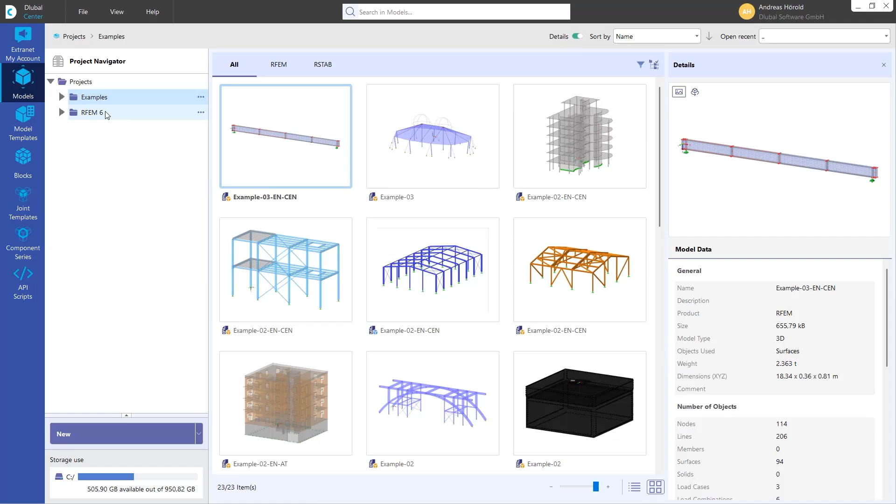People who already work with RFEM 6 know that. I would like to give you some tips and an overview of how you can work with the Dlubal Center, and show what's new that we've implemented. Let's start with the models, the most important tool in the Dlubal Center to organize your projects.

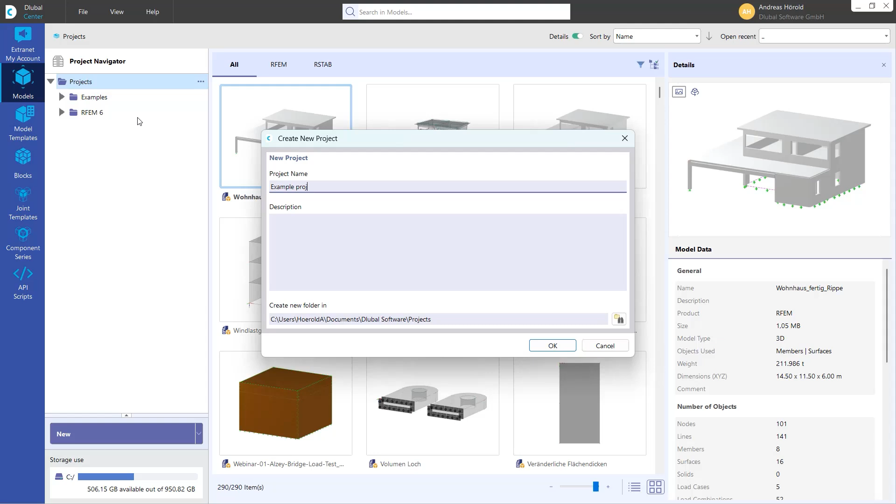Let's create a new project with a right click on Projects. I can create a new project, and let's call it Example Project. Okay, that's the new project.

I would like to create a sub-project. Again, right-click on Example Project, then create new project, and the new project should be Model House 1. I can add a description here if I want.

Again, a right-click on Model House, and I create a new file, an RFEM model in that case, and I call it House Variant 1.

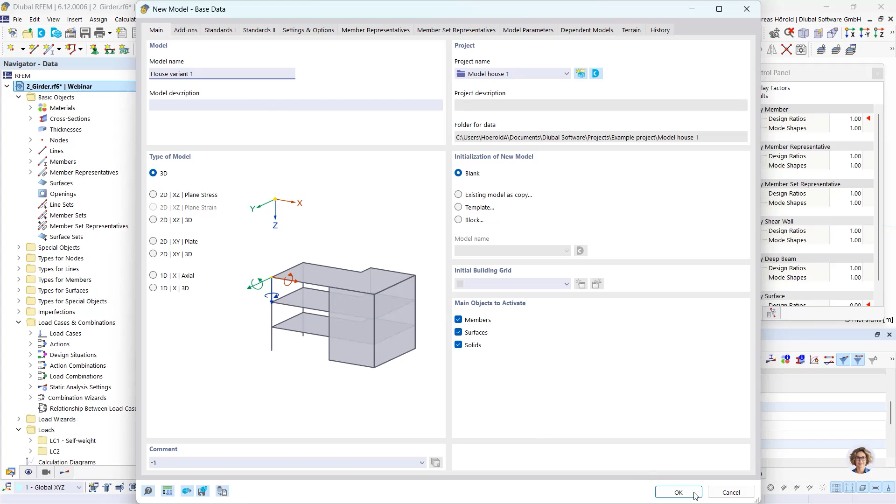Turn back to the Dlubal Center, then you can see the file here. If you switch to the list view, you can add different columns here. For example, created in version, created by user, or I can remove them with a double click, and add used add-ons, modified by company, or created by company, as you want.

Different types are available. Now you can see the added columns here.

I can open, for example for the Example Project, with a right click the folder location, and the Windows Explorer opens. I can create a new folder here too. With a right click, new folder, and I call it Model House 2.

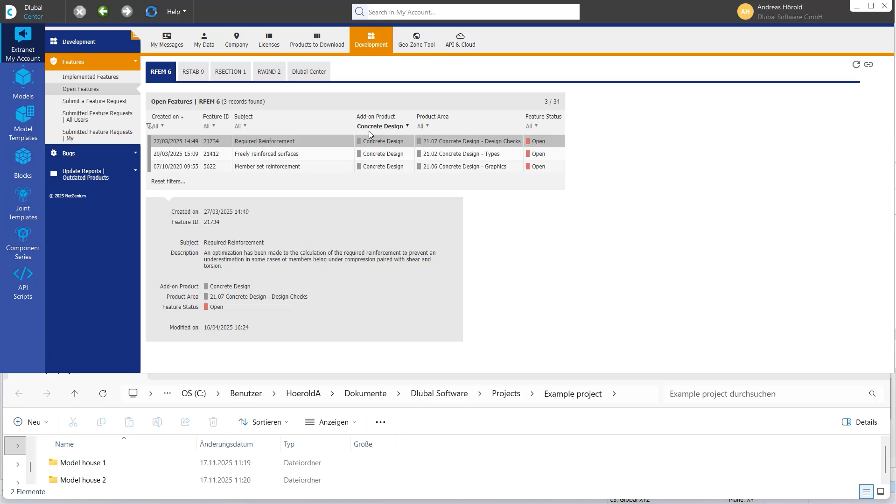Let's turn to the Extranet and My Account. You can see the Extranet messages here, or what's quite important, the development. You can see implemented features in a certain add-on, for example, or select all to see all implemented features. You can see open features for certain products or all products, and then submit a feature request, which maybe will be implemented in the future.

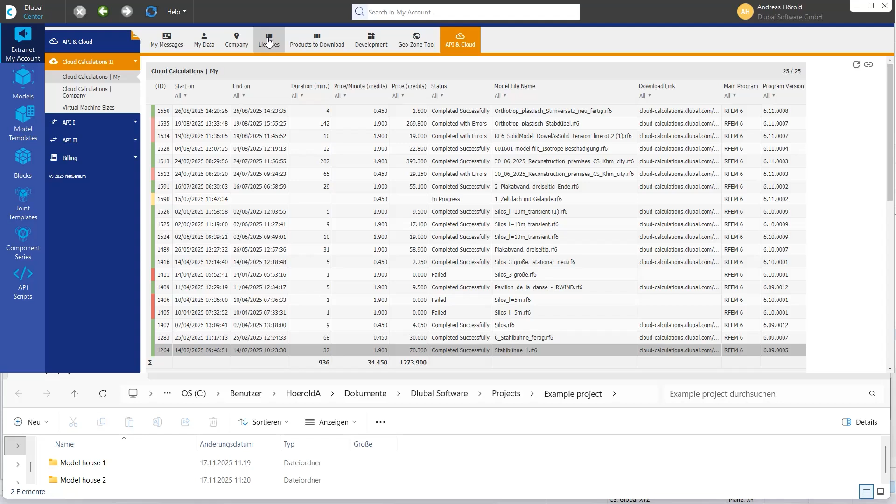Then, for example, you can see the GeoZone tool requests - those are my requests from the past. Then the API and cloud - those are calculations from my side from the past. Then you can see here the data of you and of the company, your licenses, and so on.

Then we turn to model templates. The Model Templates category in the Dlubal Center provides an overview of the models you have saved as template files. In my case, it's empty. An important message: the Save as Template function in the File menu in RFEM allows you to save your current model as a template.

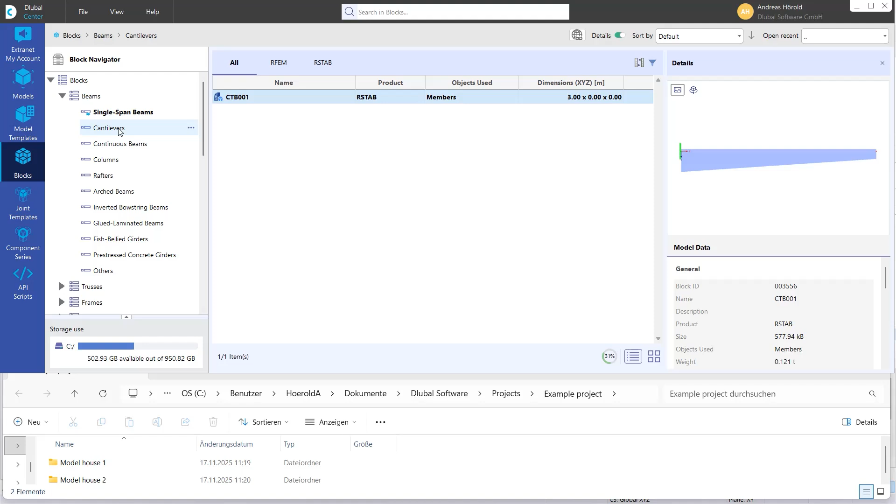Then you can see the blocks - those are parameterized, and most of the models have parameters implemented. Let's go to this view, the tiles.

Simple models and more complex models, for example curved surfaces and so on, concrete structures - a lot of blocks are available. Just use them, that's quite easy to handle.

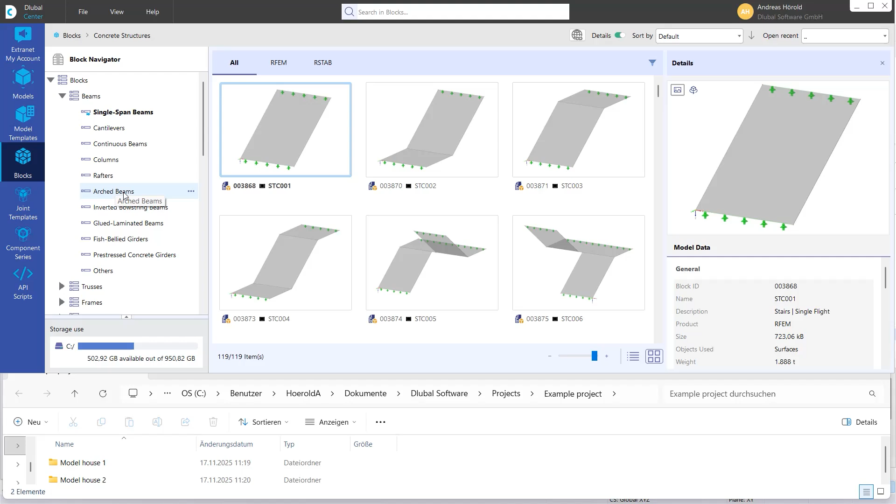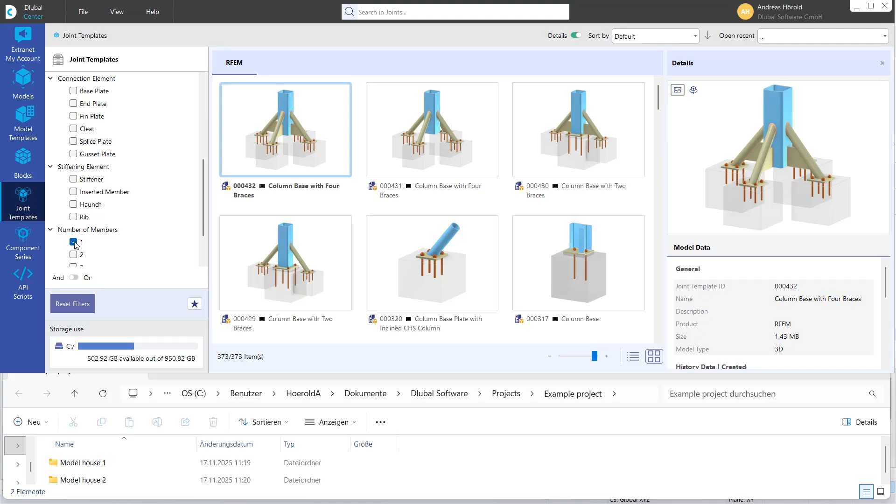Then the joint templates - you can select certain templates of joints. You can use it in the add-on, also in the steel joints add-on, for example also number of members, or joints with ribs, cleat, and so on.

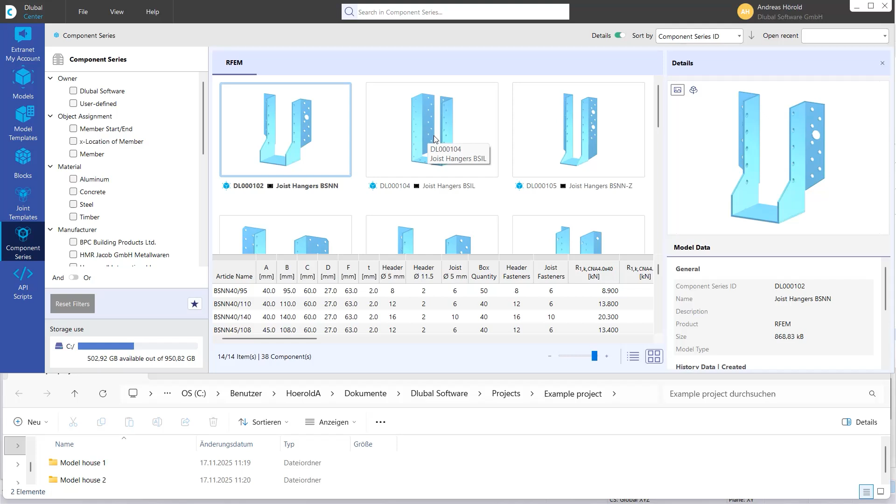Then that's a quite new part of the Dlubal Center, the component series. We are in the development of the new add-on components. It's currently in alpha version, meaning it's in preparation, and in the future you can use the values of such joints and compare your internal forces with the maximum forces of the joint.

And API scripts - there are already sample scripts that you can also use for your project. Okay, that should be all for this question. Let's turn back to RFEM.

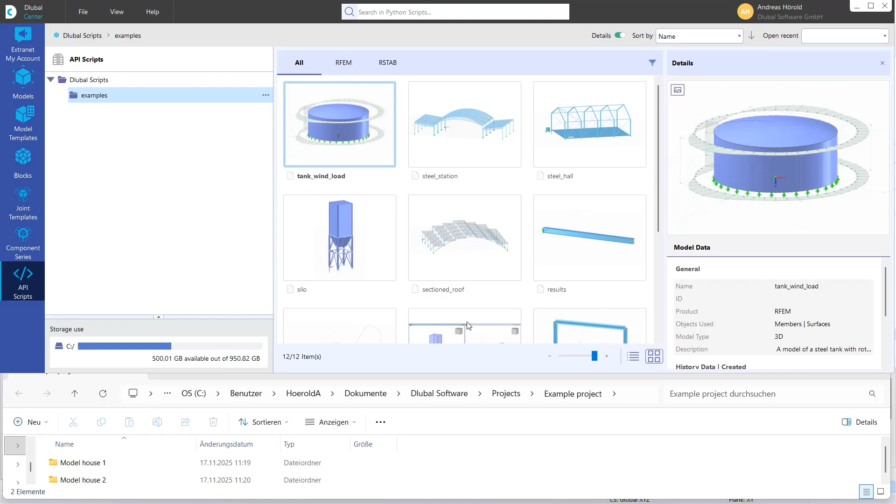The next question is: can I design longitudinal fillet welds according to Eurocode 3, part 1-8, in RFEM 6? Yes, that's possible now, soon we will release that feature, and I can show you how to do that. I've prepared a simple single span beam here made of a cross section HE 180A.

Imagine you need to use a girder with a maximum height of 175 millimeters. It's not possible, as you can see on the design ratio, with the HE 180A, and it's also not possible with an HE 180B. That's why we create a welded cross section.

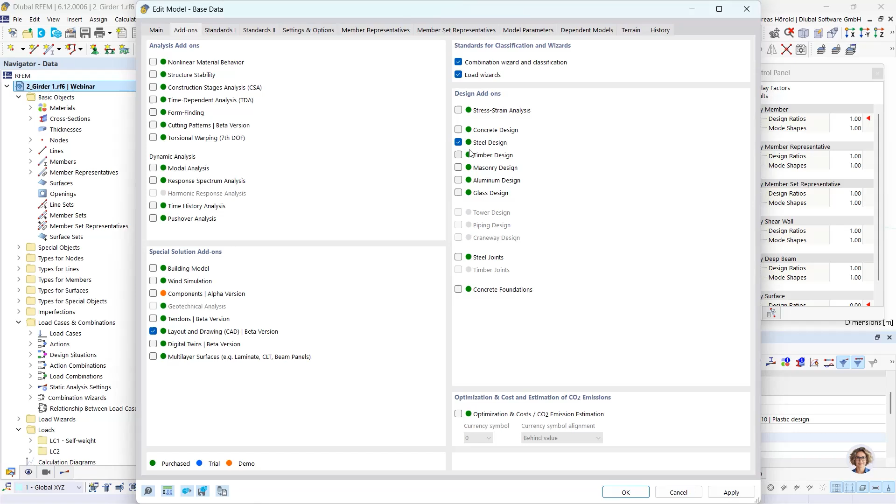At first, it's clear - I go back to the base data. It's necessary to activate the steel design for that feature. Then we create the welded section. I edit this used section, turn to the library above, and select thin-walled I section.

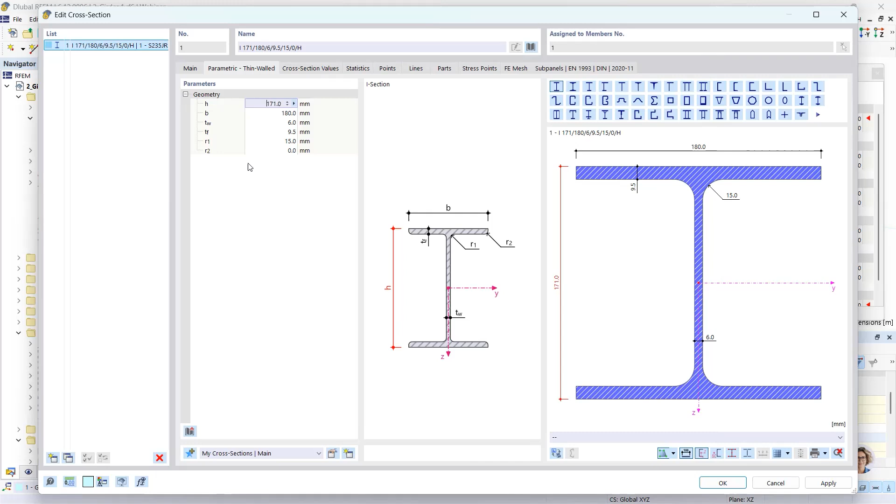Before I enter the geometry, I go back to the main part here, main section, and select welded here. Okay, then I enter the parameters.

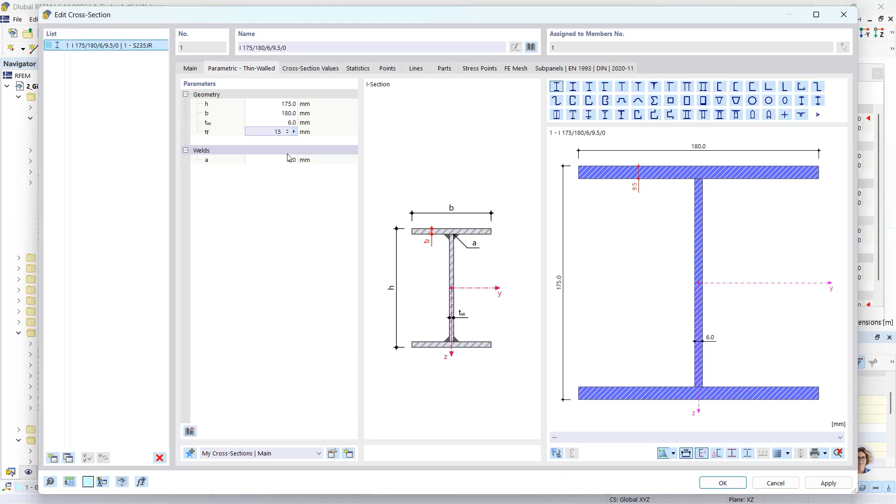Maximum height should be 175 millimeters. Then the other values can remain, but not the thickness of the flange - it should be 15 millimeters, and the weld should be 3 millimeters.

Then I have to activate the weld design. I turn to the navigator data, then steel design and the ultimate configurations, default. I can turn to that chapter here also when I use a double click on the beam.

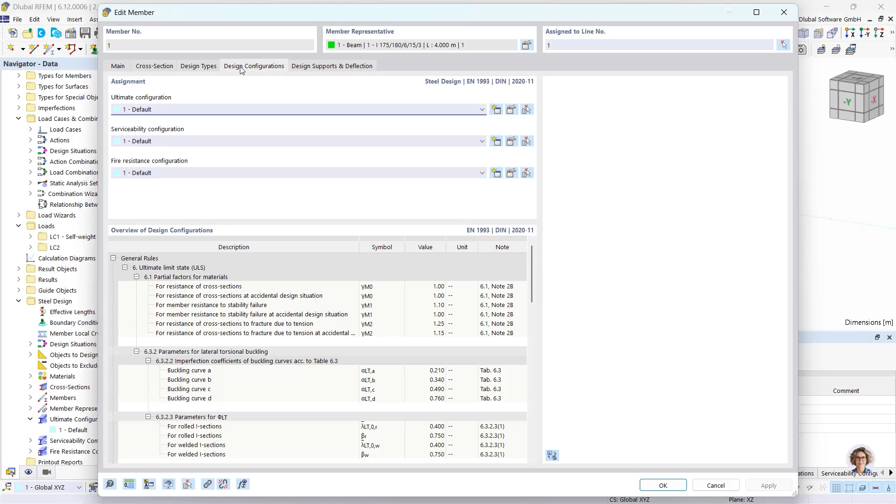Then the design properties are activated and I can find the design configuration here, and I can edit it also with that button. So then I have to activate the design of the longitudinal fillet welds.

The correlation factor should be determined according to the Eurocode. It's dependent on the material, and in our case it should be 0.8 because we have a material S235. And if you want, you can also use a user-defined correlation factor.

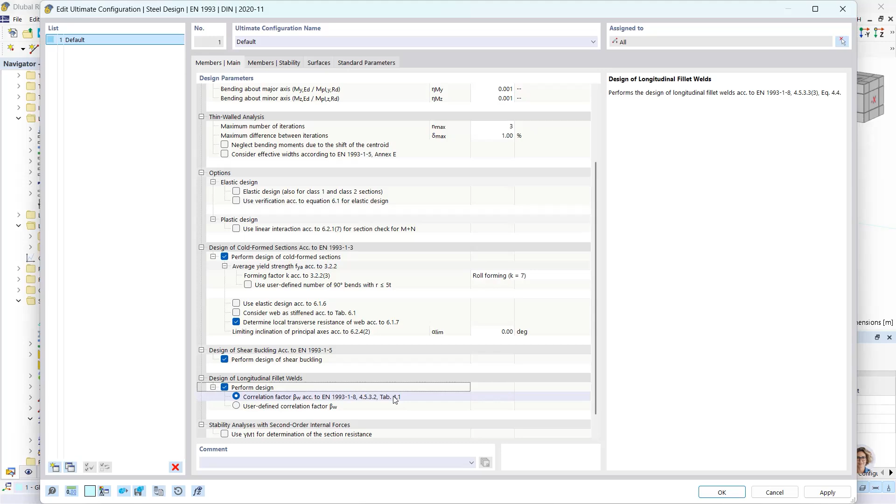In most cases, we will use the automatic data determination according to Eurocode. Okay, so then I start the steel design again.

So the combinations are calculated in parallel. Let's turn to the design ratios on members. Yeah, and you can see there's an error.

If I double click on the line, the details are opened and you can see the throat thickness of one or more longitudinal fillet welds is smaller than the limit according to Eurocode 3.

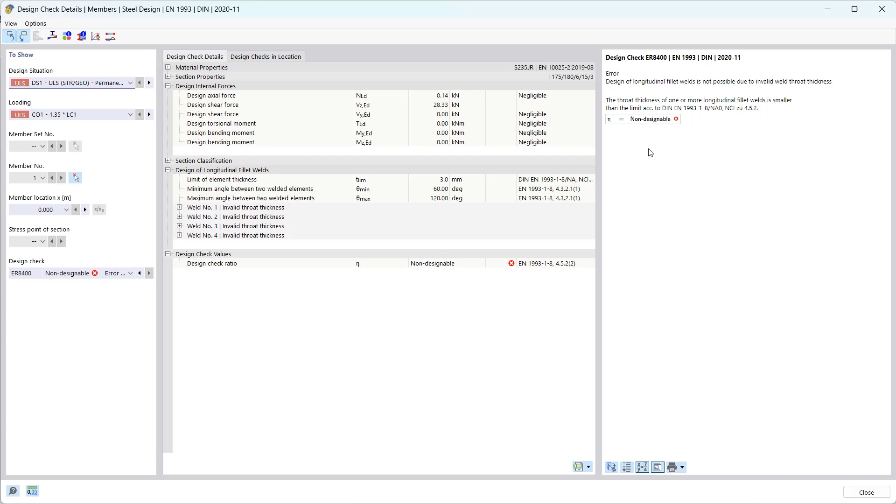Now the program checks that automatically. In that case, the weld is too small and we need to increase the weld. So I turn back to the navigator data and do a double click on the cross section, and I increase the weld to 4 millimeters. Okay, then I run the steel design again.

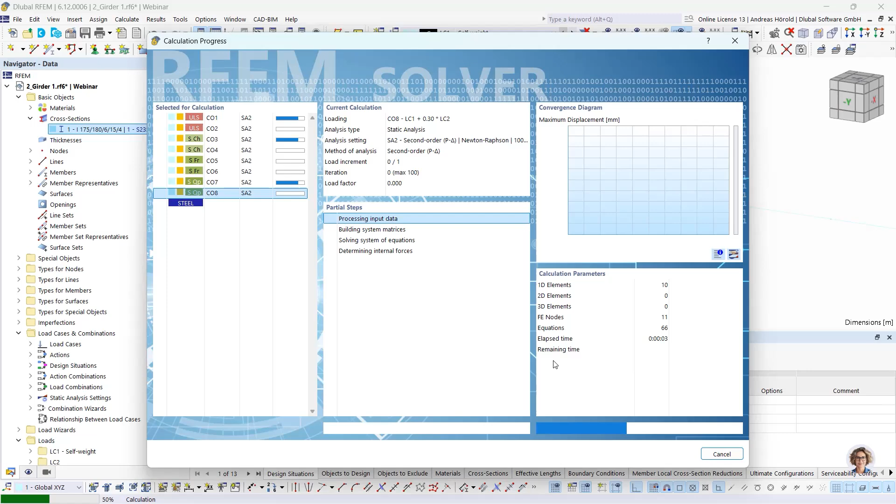So now the design of the weld is done. Double click on it and I can see the design checks - the 0.8 can be found here, the correlation factor, then the thickness of the weld, and the design check ratio is approximately 30%.

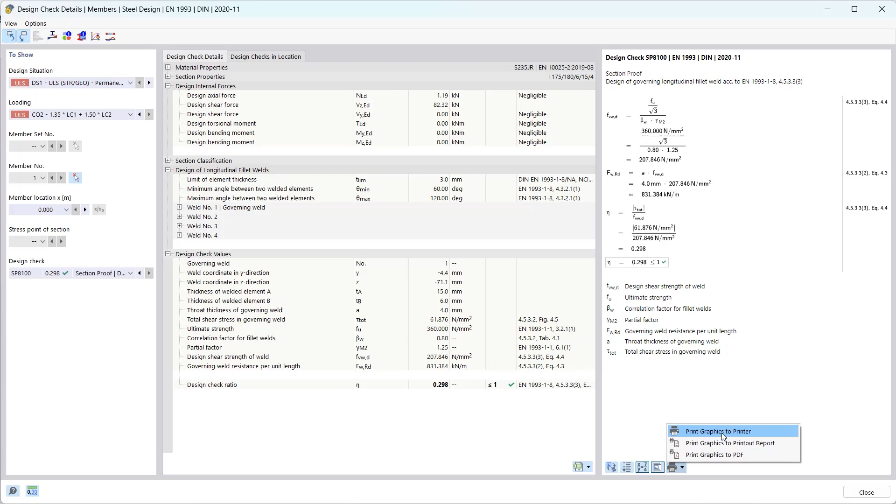And of course you can also print the formulas and so on, on the printer or in the printout report. Okay, that should be all to this question and to this model.

The next question is: how can I smooth results in RFEM 6? That's an often asked question. You can do that with a surface results adjustment. In RFEM 5, we called it average region.

Such a surface results adjustment describes an area in the model whose graphical results are not represented by the actual diagrams, but as mean values. And you can use a user-defined adjustment area to evaluate the smoothed surface internal forces.

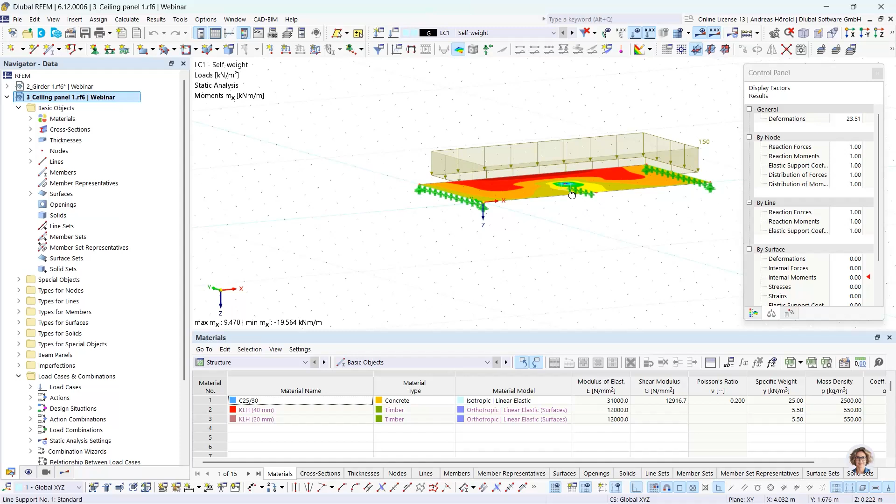You can see that ceiling panel here and a wall here. Imagine it has a thickness of 20 centimeters. And you can see there are singularities at the end of the wall here. So we would like to use such a surface results adjustment to smooth the results.

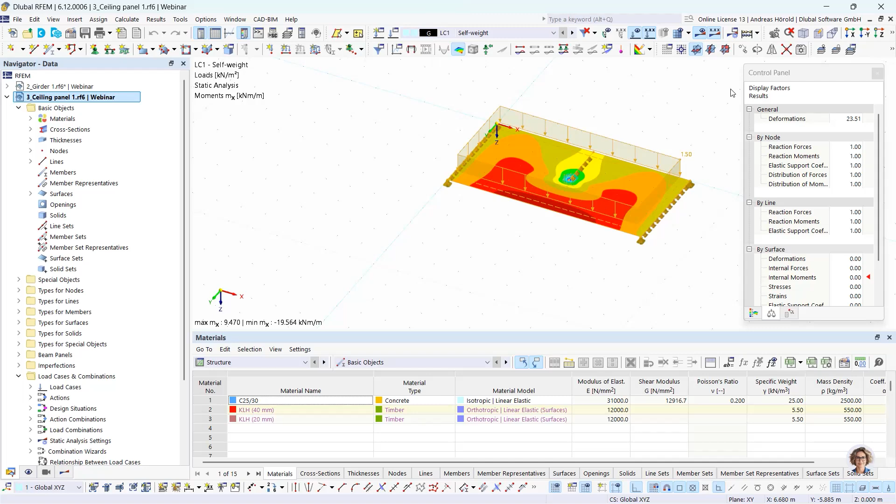So to compare the results, I copy that ceiling panel - select all, then use the move and copy function, create a copy, 6 meters in Y direction, including loading. Okay.

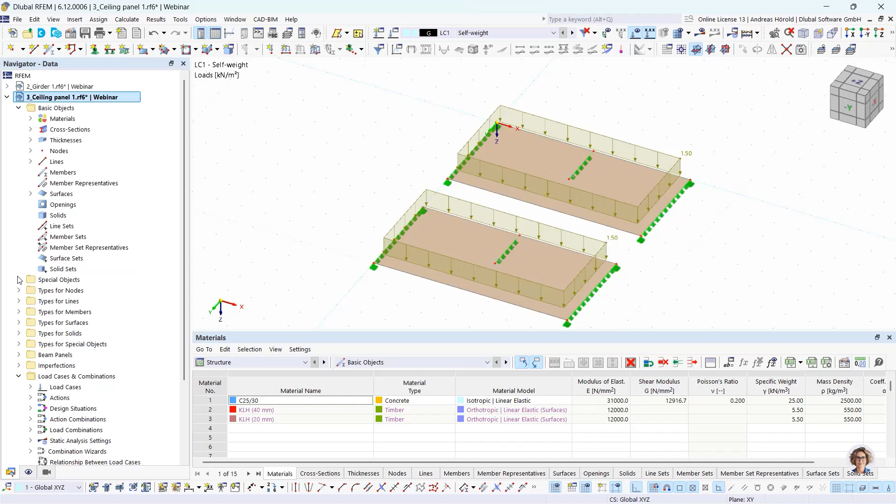So then I turn to the navigator data, and under special objects, you can find the surface results adjustment. You can also find it in the menu under Insert, Special Objects, Surface Results Adjustments, and I open the dialog box.

At first, I have to assign a surface. That surface, okay. Then you can select different shapes here: rectangle, circle, ellipse, and polygon. I use rectangle, and the dimensions in our case should be 20 by 20 centimeters. And I select the node.

So, to define the position correctly, I move it to 10 centimeters to depict the wall end correctly.

So then there are different adjustment types. The default setting is for the direction u, averaging of my, mxy, and so on. It's for basic internal forces in surface direction y. And the second line here is the default setting for basic internal forces in surface direction x.

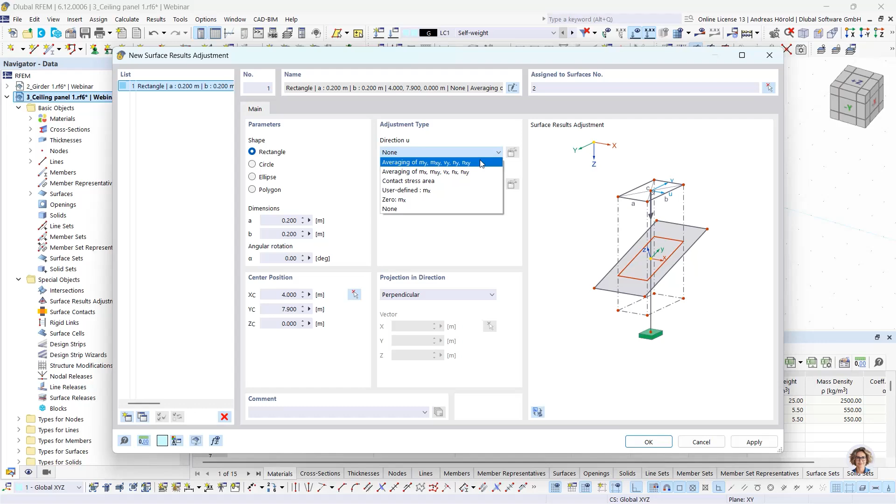So I use the default setting, press OK, and then we calculate everything again.

And let's compare the internal forces for both slabs. The maximum value for both is 90.5 or minus 90.5 - the mx internal forces in that case.

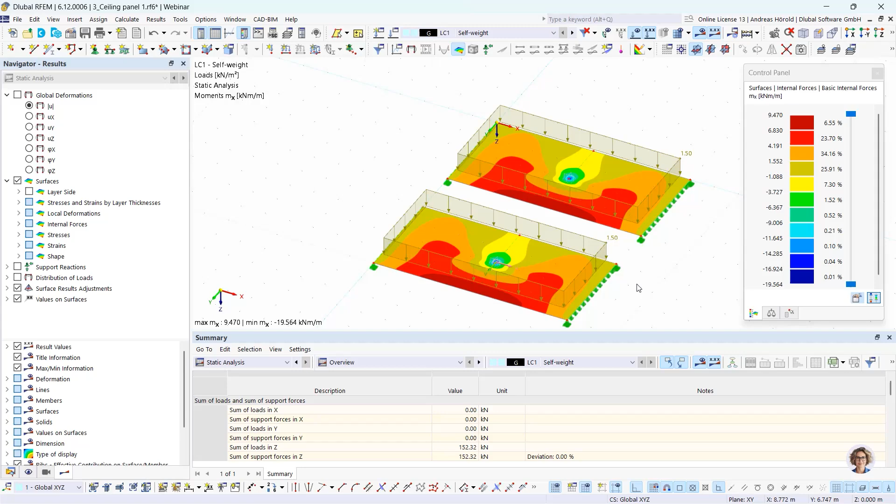And if I want to see what the maximum value is here, I can, for example, deselect that slab, hide selected objects. Okay, and now the maximum value is minus 16. That's the possibility to smooth results in RFEM 6.

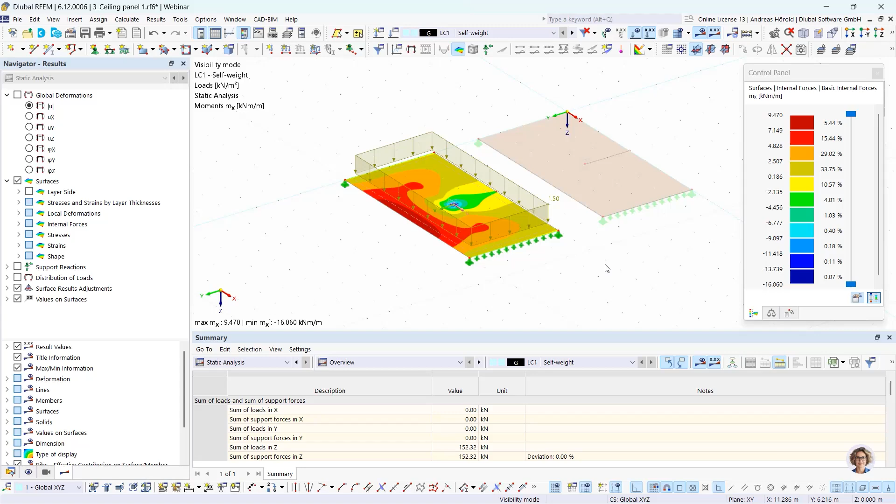Thank you, Andreas. I will continue with the next topic. The next question is: where can I find specific wind settings in RFEM 6.12 and later?

As you have maybe already realized, we changed the GUI in RFEM 6 a bit to be able to hand over more data to RWIND with the GUI in RFEM 6 without stepping directly into RWIND. Let's start with the basics. Usually, at first you activate the add-on wind simulation, and you can choose the standard group for your wind profile in order to determine your automatic wind profile for your region.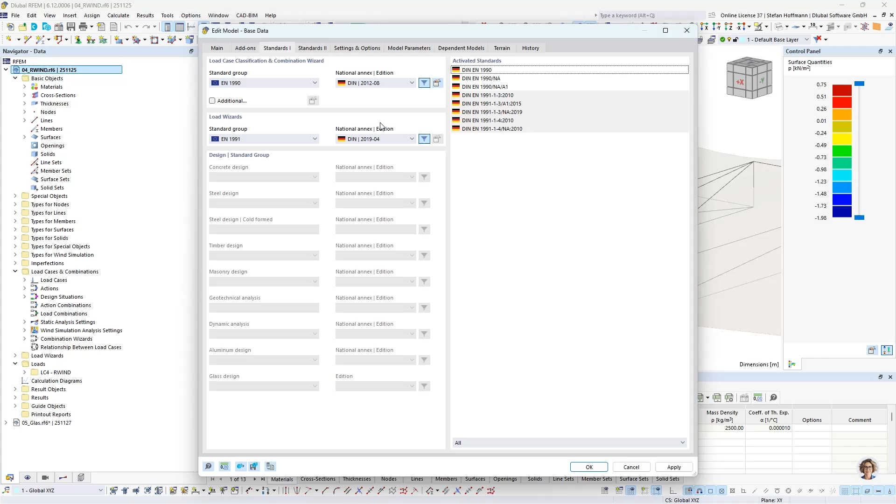If you're already interested in adding a terrain to represent your location specific behavior of the wind, maybe by trees or some mountains, you can already activate a terrain in the base data terrain settings. You can choose between no terrain, of course a horizontal plane, an inclined plane, some table values, or - as I am using, and this is most likely also the first change - an IFC file.

Model objects - this is no more found in the mesh settings to adjust the IFC as a terrain. You already input it as the base data in the tab of terrain. So I'm simply using an IFC file where I've modeled a simple shape of my terrain, and you can do some more inputs on the size of your terrain already here.

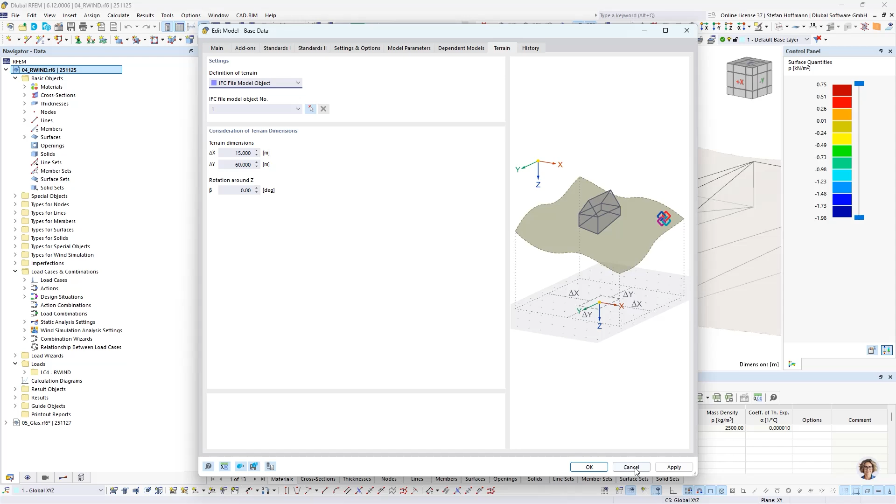So if we jump into the model, you already know that in the mesh settings you have a tab of wind simulation, and for the regular customers, you already realize that this tab has changed a lot in the GUI. We moved some parts, of course, and you now have the option to assign objects from shrink wrapping - the shrink wrapping mesh, which is later necessary for the calculation in RWIND, in order to be assigned to your main structure or surrounding objects.

So you can already split in over here, but later on also in the objects - this is currently not in use. You can as well choose to activate the terrain, which we set in the base data, to be considered for the calculation. You can also jump into the base data.

You can moreover, as already known, adjust the level of details for your members. You can choose to close hollow sections. You can consider a surface thickness in general already, and the two known options to keep our wind results if the mesh is deleted, and/or to run RWIND in silent mode.

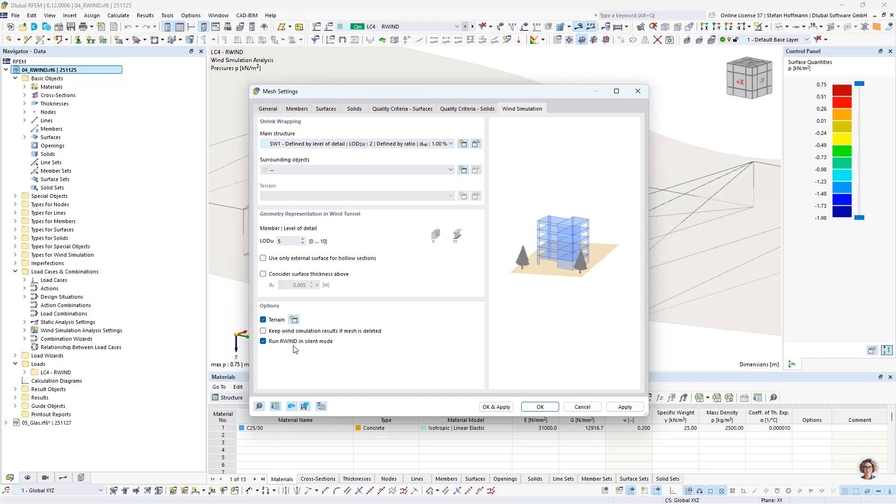As known, you also have settings in the load cases from the analysis type wind simulation. So if we jump into the tab, this has not changed a lot, I think. You can assign wind simulation analysis settings, where you can, for example, differentiate between steady flow and transient flow.

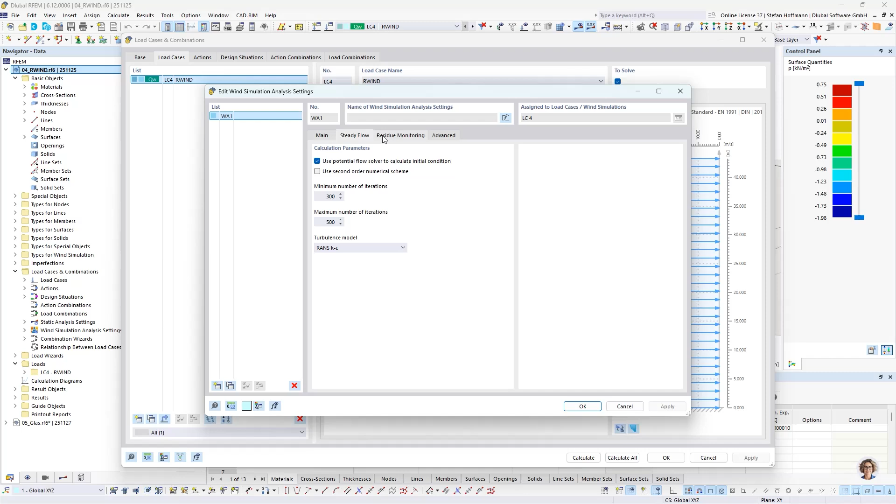You can hit some more options to be handed over to RWIND. You can also step into the tabs to add some more input for the wind tunnel. The wind profile did not change from my point of view, so you can simply assign a wind profile according to a standard and hand this over to RWIND directly. Some more checkboxes at the bottom - everything is usually explained in more detail in our online manual.

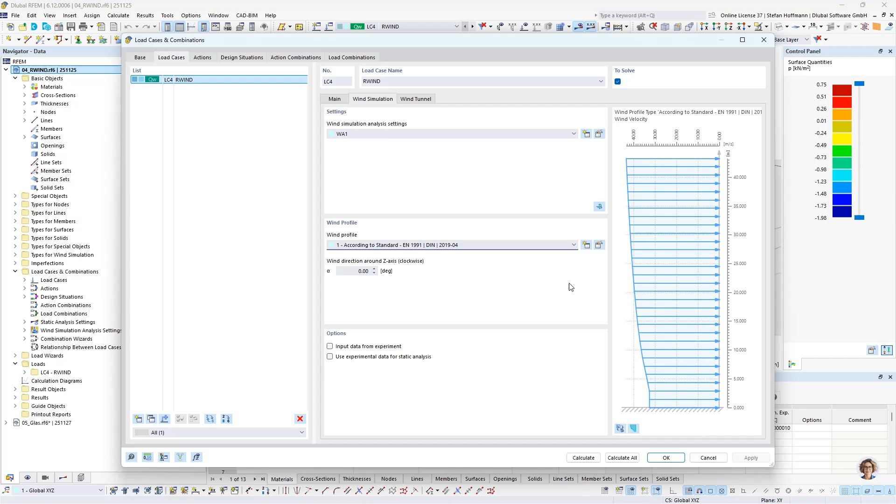The biggest change, in contrast to the mesh settings, is that now every object, if you click on it for example, has a specific wind simulation setting on its surface which you can activate. You can see this tab allows you to assign different shrink wrapping settings for surfaces. So if you have a small surface, you can assign a finer mesh later on because you're interested in facade engineering and results at that point. And if you have a bigger surface, which is of less interest, you can assign a coarser mesh.

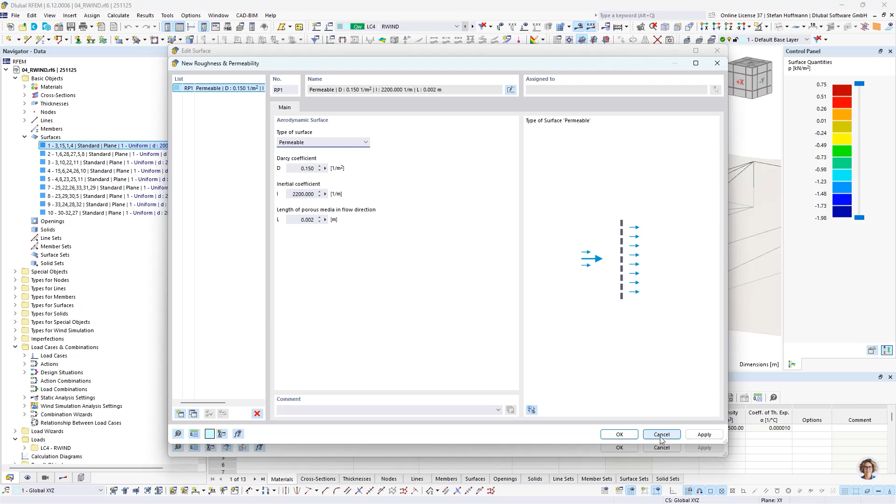You can also define the roughness and permeability as an object. So as you may already be used to in our wind tool, you can use a closed surface and enter permeable options for it, so the mesh will not be fine, but it will be considered as permeability later on. You can also check to consider surface thickness, and an interesting option is that you can simply exclude this object from the wind tunnel.

What we did not change is that you still have your wind simulation analysis results, and you can still split the view to show it on the original model and/or the computational model.

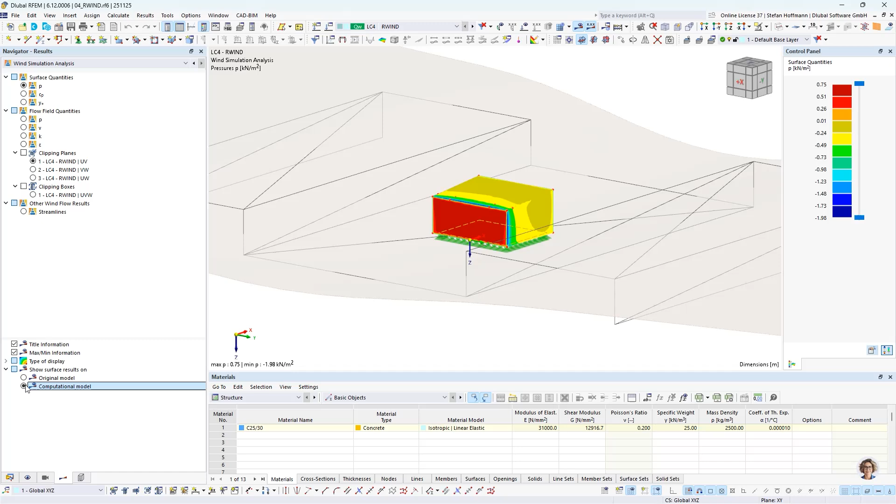We will step to the next question.

The next question is, can I control the shear coupling for laminated glass in RFEM 6? Usually, with laminated glass, shear coupling is of interest, because if you have a layered pane with two panels of glass and one foil in the middle, one worst case is that you do not take the shear coupling into account, having big deformations and stresses only in the glass panes. But it might also be of interest, which is why we use laminated glass, that you can take the shear coupling into consideration. Sometimes you are allowed to do this.

With regards to the German standard 18008-1, it offers two requirements in chapter 7.2.1. It mentions that when determining the stress and deformation of laminated glass and laminated safety glass, favorable shear coupling between the individual panes must not be assumed. But in the next chapter, 7.2.2, in the case of unfavorable shear coupling, e.g. in the case of restrained stresses, full shear coupling must be assumed. So you usually have to consider both states in your calculations.

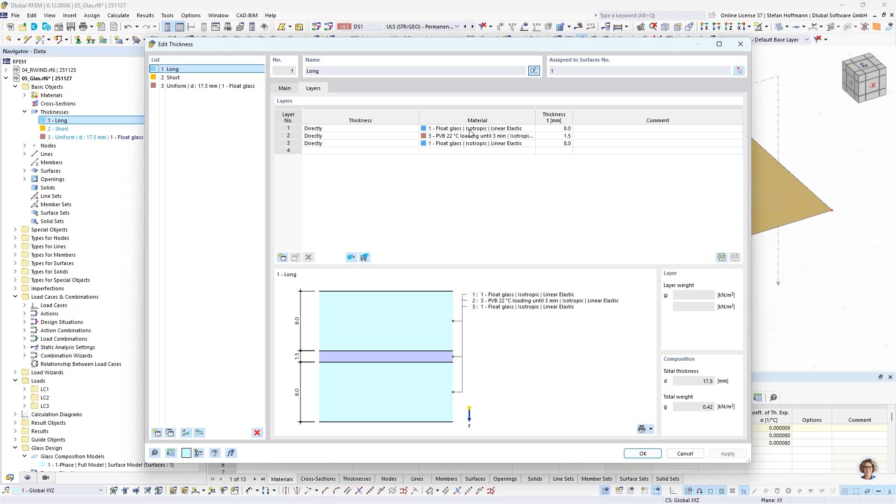First, a quick look at our model. It's a glass pane with 4 point supports, and I have created a thickness from the type glass composition. I have 3 layers: 2 times float glass at 8 millimeters, and 1 foil in the middle. You can use the foil with material values from our material library. I'm using a foil with a load duration under 3 minutes, so the E modulus will already change for our foil layer. This is my glass composition. For the calculation, you have to assign, or it usually automatically assigns, a glass composition model, where you can later choose from a solid model to also take into account laminated glazing.

Currently you can differentiate between coupled and uncoupled shear coupling between the glass layers. I have defined uncoupled, so there is no shear coupling in my main model.

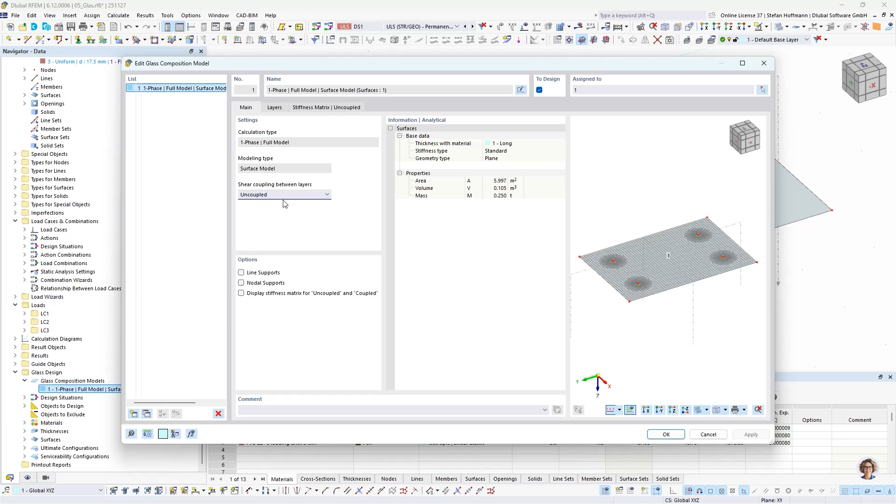So how do we consider both shear coupling states? It's quite easy in RFEM 6. We do this by checking our design situations. Once you check glass design, you can see a further added option at the bottom of the design situations: it mentions inverse shear coupling between layers for surfaces with glass compositions. Remember, we have a glass composition model without shear coupling, so for every load combination in design situation 1, if we do not check this checkbox, this is uncoupled. We can simply copy this design situation and check this checkbox for the same load combinations, where we will then take the full shear coupling into consideration. Just by adding this one option, the load combinations will be calculated automatically.

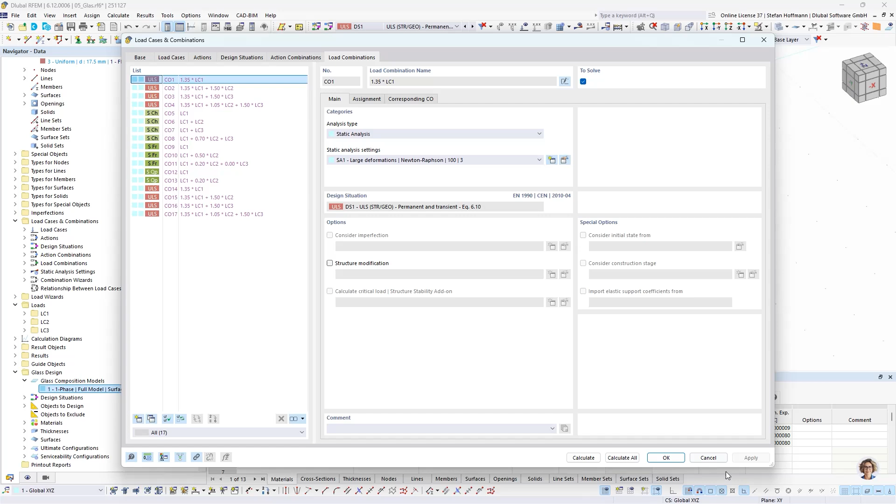If we step quickly into design situation 1, with no shear coupling, we have a maximum deformation of approximately 50 millimeters. And if we step into the one with full shear coupling, the deformation, of course, reduces as expected, related to the underlying theory for our 2D stiffness.

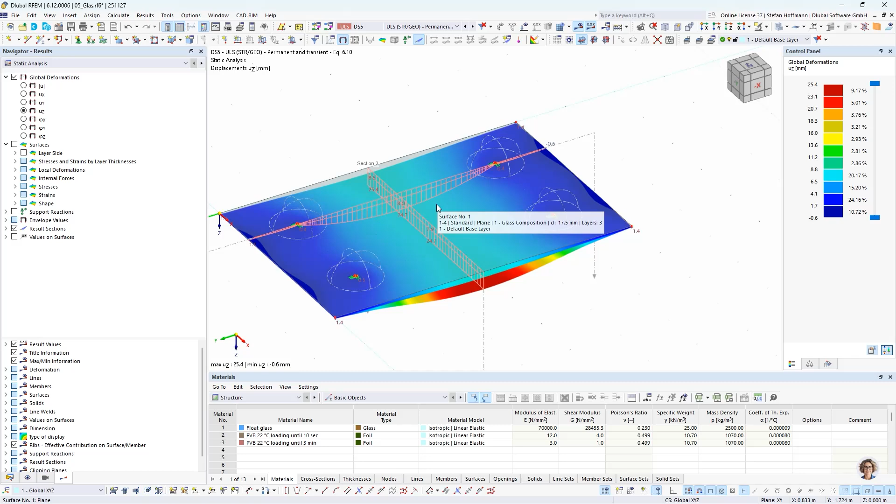The most interesting part is the glass design afterward. I have done 2 sections through the model, and we are above our design ratio, so we would have to adjust our model. But mainly, not taking the shear coupling into consideration, we would expect, with point supports, to have the biggest ratio in the middle of the field, but this would decrease once we take the shear coupling into consideration.

This affects usually, most likely, our support points with the point supports, so the stress ratio may increase. It's not only in the case of restrained stresses, but from my understanding and experience, you can also expect that stresses may increase with a full shear coupling at the place of point supports. You can take this into consideration by simply activating this option in the design situation.

Let's step to the last question for today. We will stay in the model. The last question is, my mouse is not working as usual - what can I do? Let's reflect on the mouse function.

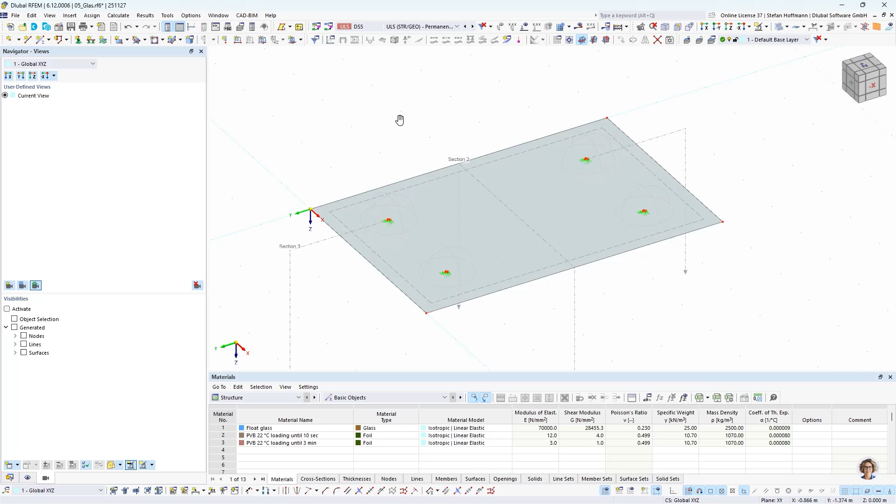With the left mouse, you can select items. With the mouse wheel, pressing it down, you can pan. With the right mouse, you usually get a context menu with some options. If you hit Control on the keyboard and press the middle mouse button, you can rotate. If you select a node or object first and hit the Alt key and press the middle mouse button, you can rotate around that object. And you can move, of course, with the middle mouse. But what happens if you only have a mouse with one key, or if you are at your laptop where you do not have a middle mouse button?

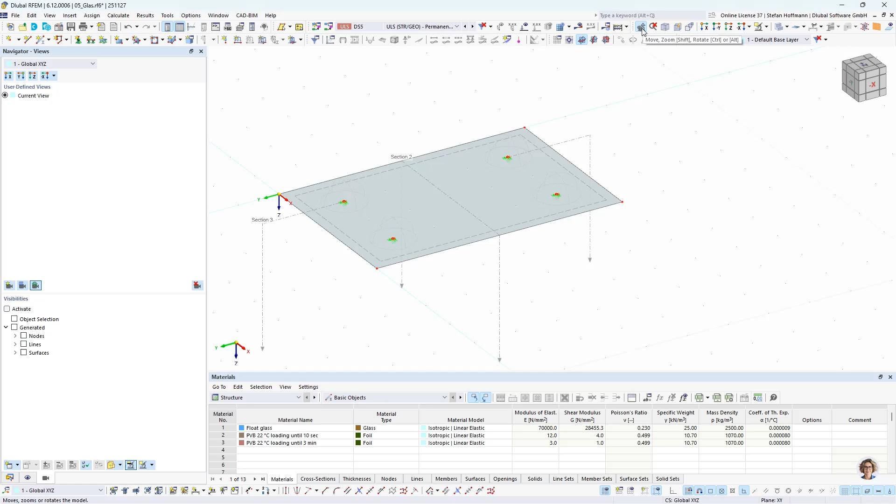We introduced this option over here to move, zoom, rotate. If you activate this, the mouse action will change. With the left mouse clicking, you can move. Holding Shift, you can zoom by moving the mouse and clicking the left mouse button. And with Control or Alt, you can rotate by simply clicking the left mouse button. So if you think you would like to select something and it's not working, remember that this option might be active, and it also affects the view cube, so it's not fully functioning anymore. If you're confused, remember this option, uncheck it, and you have your normal mouse options back again.

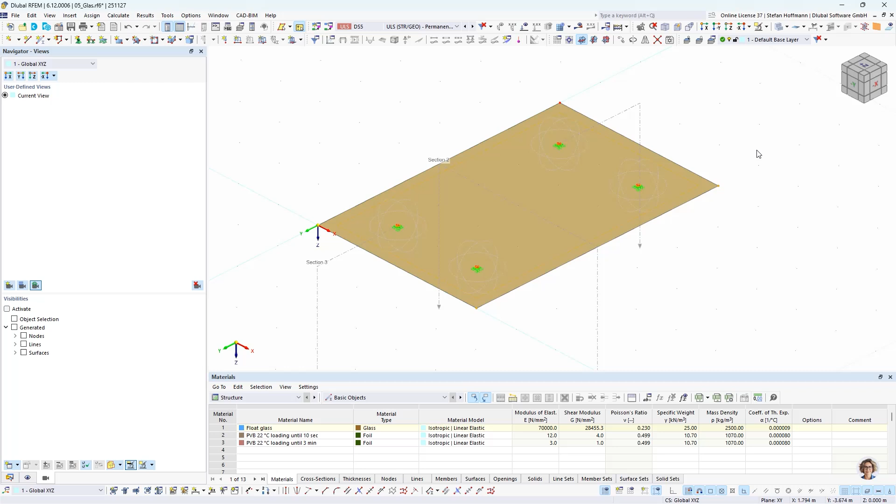What I would like to add is the function over here to add something to the selection or create a new selection. Usually you can mark the surface, hit the Control key, and add more objects into the selection. But if you don't want to do this, you can check this box and click items, objects, one after each other. But this may cause trouble if you don't remember you activated it, because then a left click will not undo the selection - you have to click Escape.

The last two buttons I would like to add to this topic are these two. Both allow you to interact with the model and the table. As we had in the glass design, if you have results and click in one row, you will see a red arrow pointing at the place. If this is not the case, or if you click on one node and it is not highlighted in the table, then remember both buttons - they should be the reason why it is not highlighted, and vice versa.